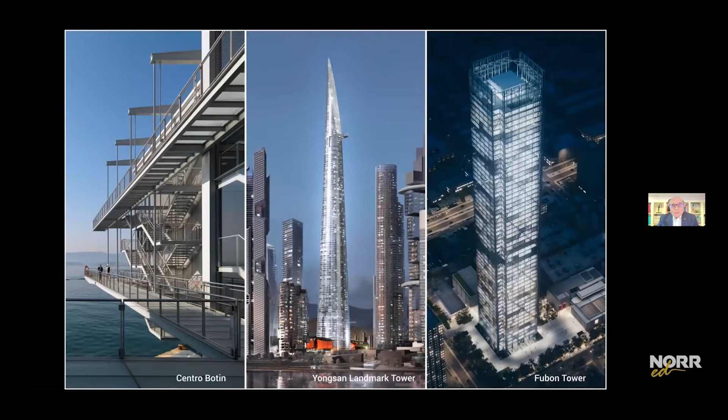End of quote. Maybe today, March of 2022, we can remember what Walter Gropius professed about design in his letter to Ove Arup in 1966, that architecture begins after engineering ends. Welcome to this NORR Ed engineering series today, as we feature our guest speaker, an internationally recognized structural engineer, and an engineer that I hope you will remember after the presentation today.

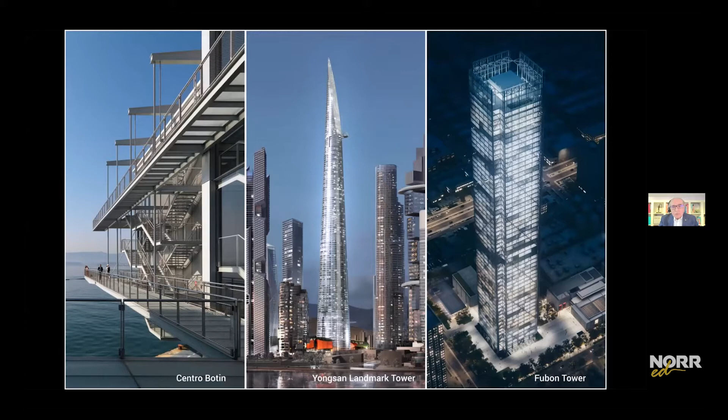I'm proud to welcome William Algaard, Director, Structures, Arup, London office. William has a PhD in civil engineering from the University of Glasgow. He also has a Master in Civil Engineering from the University of Glasgow and a Master of Sustainability Leadership from Cambridge University. He is Arup's London Tall Building Skills Leader and has worked on tall buildings in North and South America, Europe, the UK, and Asia. William has a background from academic research and Arup's Advanced Digital Engineering Group. He has developed a broad range of specialist skills in advanced analytical approaches within dynamics, blast, seismic engineering, and nonlinear response.

In 2005, William joined Arup's building group in London, where he led the engineering design and delivery of signature project elements at the Art Institute of Chicago. The last decade, William has acted as a structural engineer, leader, and project director for a broad range of projects, such as the International Whittle School developments, the A25 complex in Taipei, and the CERN Science Gateway.

William continues in the Arup culture and tradition set over 75 years ago, challenging convention, collaborating with architects, applying first-principle technical approaches and advanced analytical methods to realize elegant engineering architectural solutions. I will now ask William to share his presentation, Challenging Convention and Inquisitive Structural Design Ideology. I turn it over to William.

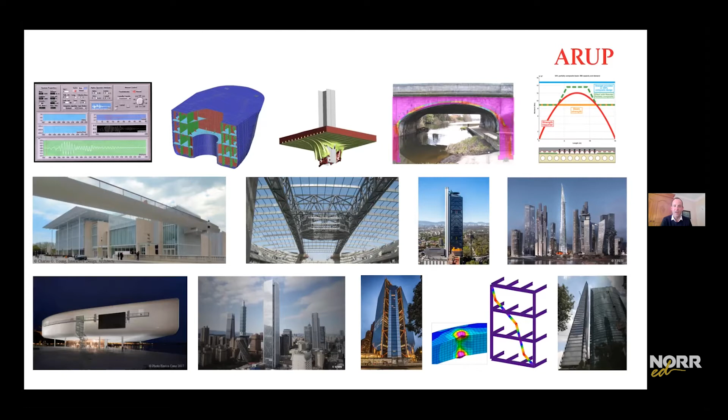And I'm certainly hoping for a good discussion afterwards, so start preparing those questions, and hopefully we can pick up on whatever you find most interesting later on.

After graduating, I decided to stay at university and completed research within something called pseudodynamic testing. This is an approach relevant to seismic design of buildings, where we model part of the system numerically or on the computer and other parts physically. The physical model is meant to capture the complex and tricky non-linear behavior, such as cracked concrete, while other variables are represented computationally without any difficulty or compromise. This was done at Glasgow University, and I know there are people from Glasgow on the call, so it's great to be able to talk about this work that I did in the very late 90s.

So even though I consider this work quite interesting, and the concept really does work, splitting the model between the lab and the computer, I'd argue I made many important developments, or at least I thought they were important at the time. But my advice to any students on the call would be to think about doing research in collaboration with industry and avoid being in an academic bubble, because I'm not totally convinced mine was as well linked to reality as it could have been. It's important to make the work as applicable as possible. But for me, the mindset of an experimental approach I developed during this period still influences me as an engineering designer today.

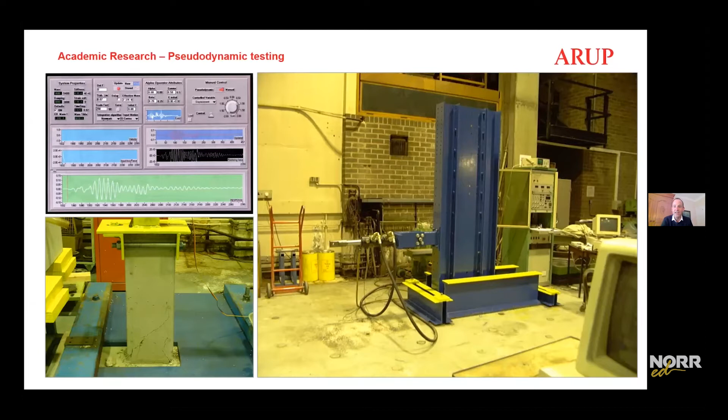So you might be asking, what does this have to do with architects or building engineers? And the answer will be not very much. It's one of the things I worked on not long after joining Arup in 2001, 2002. I completed detailed stress and buckling analysis on a floating production, storage and offloading vessel in the North Sea. The link here is around the tools and analytical approach I picked up during that work, which I've since applied to design projects later on.

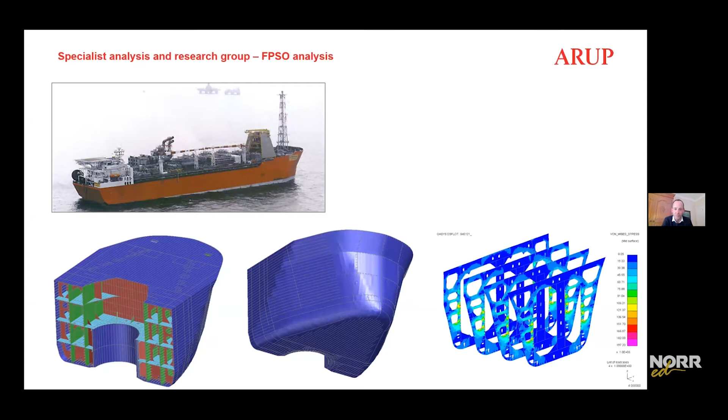Another unusual project, here I was looking at the behavior of floor slabs due to steel sections being dropped onto them during construction. The initial motivation was around site safety, and whether floor slabs could provide sufficient impact resistance to allow workers underneath locations where steel sections were being erected. The takeaway for me was building a deeper understanding of material behavior under extreme conditions and large deflections, and the concept that you can calculate most things. If you do it correctly, you can develop a really good representation of even the most complex structural behavior like this. It's definitely helped shape the approach and trust I have in analytical techniques I apply today.

When I prepared for this talk, one surprising finding was that the publication we made on this work, which took only a couple of months, was actually cited in many more publications than my work at university. So applicability is really critical.

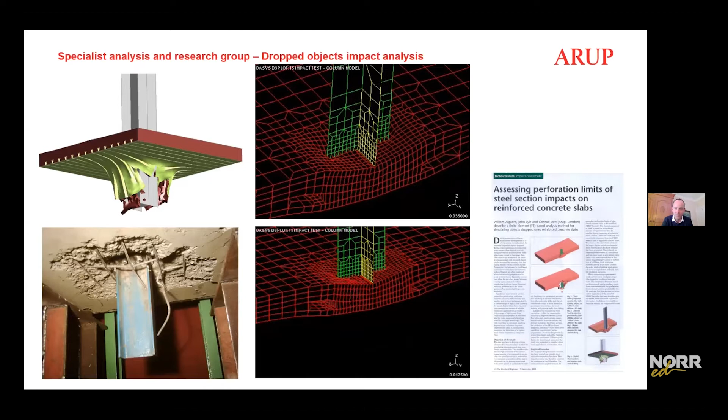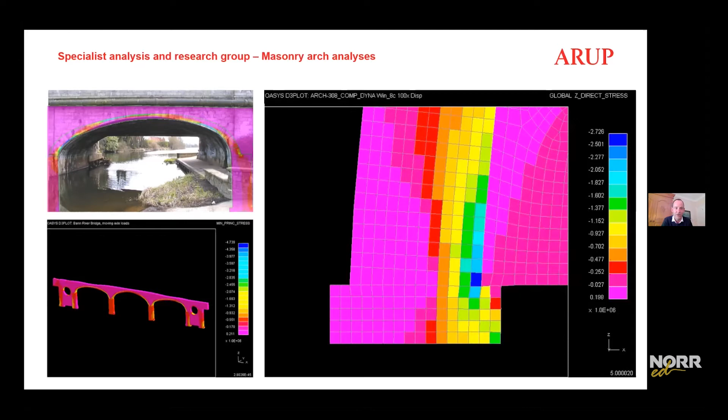Potentially even more peripheral is this analysis and assessment of some masonry arches. Masonry is surprisingly complex compared to steel or even reinforced concrete, because it carries essentially no tension and relies on focusing compression down narrow lines. I'm not going to go into detail of what this is, but it's another example of being able to develop a very complex analytical representation of something that behaves in a tricky way, building up that belief that this can all be done. You just have to apply the right tools and processes to make it happen. This still impacts how I approach things in my work as a designer today.

I meant to say earlier that all of these projects I worked on as part of a team. None of these projects I did by myself, and I feel extremely privileged to have worked with so many talented people through my career. I'd say this is the primary reason why I've been able to gain the experience I have along the way. Later on, this is not just from other structural engineers, but also from the broader engineering teams, and also from architectural collaborators through multiple projects.

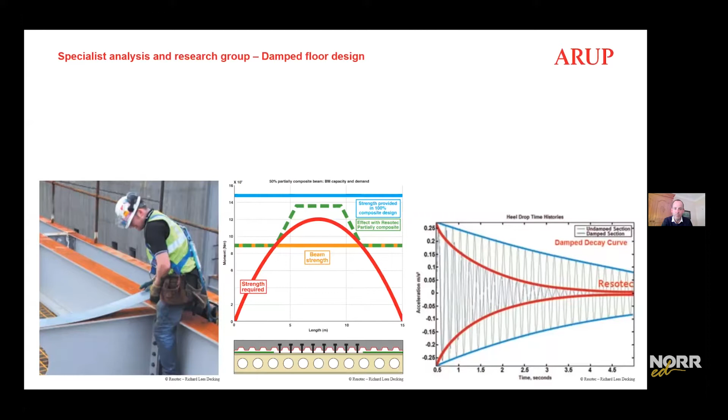So enough about research and specialist analysis. You might be pleased to hear that this is now about design and construction, and primarily buildings.

This is the first project I worked on, the Nichols Bridgeway at the Art Institute in Chicago. Some of you may know the project and have walked across it. The project director at Arup quickly identified special engineering challenges when Renzo Piano said he wanted the bridge to be like a blade flying through the air. This is one of the first architectural sketches, indicating a depth of 2 to 5 feet for the 200-foot long span.

In the end, it was even more slender, about 1.35 meters deep for a span of more than 60 meters. This was not long after the Millennium Bridge in London, famous for its lateral wobble, or synchronous excitation. So bringing in specialist dynamics and footfall skills to the project was definitely the right approach.

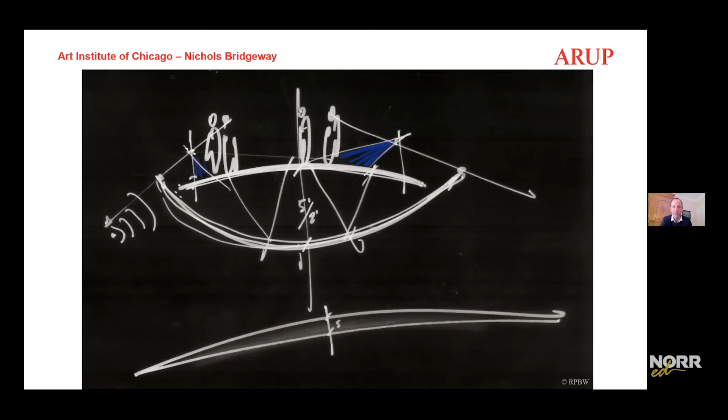Jumping ahead, this image during construction shows the southern half of the bridge. There's one support far to the left, and two supports by the building itself - one by the cherry picker and another just to the right of it. Then there's a roughly 15-meter cantilever, if I remember correctly.

There was a funny moment in the architectural discussions on this project, where after successfully eliminating all the columns in the southern half of the bridge, the question came up: can we now take out all the columns in the northern half? Unfortunately I had to disappoint on that one, but very successful nonetheless.

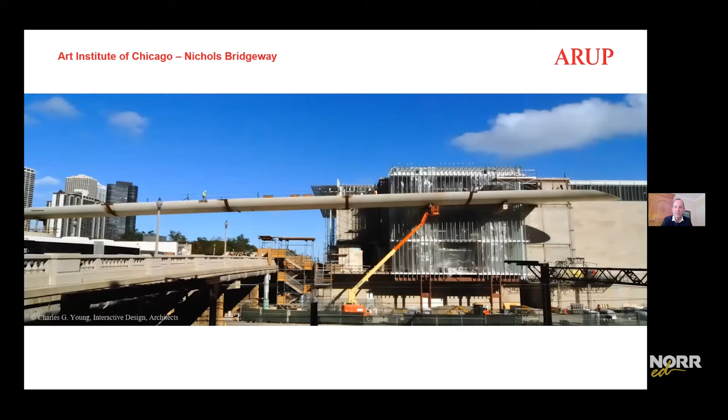So in the end, the result, I would argue, certainly was a little bit blade-like. But how did we actually get there?

One of the architectural references for the design was a ship's hull. It was clear early on that architecturally it was important that this was an expressed shell structure, not a great big girder or pair of girders clad with a shell. Given the proportions of the concept, it became clear during bidding and tendering - when somebody proposed a clad solution instead - that this turned out to be completely unviable. The proportions are so squeezed that it can only work as a genuinely expressed structure.

Having worked on ship hull analysis previously, this also became an engineering reference for me, and there are loads of parallels. Even using different design codes, the physics is often the same - though not always; there's no wave impact on this bridge, at least I hope not. But most of the physics is the same, and not only the physics, but also the analytical tools we adopted were the same.

All of this engineering was pretty familiar to me, and I could do this, but the ping pong with the architects and the concept of design as an open-ended and open process was certainly new to me, and something I started enjoying.

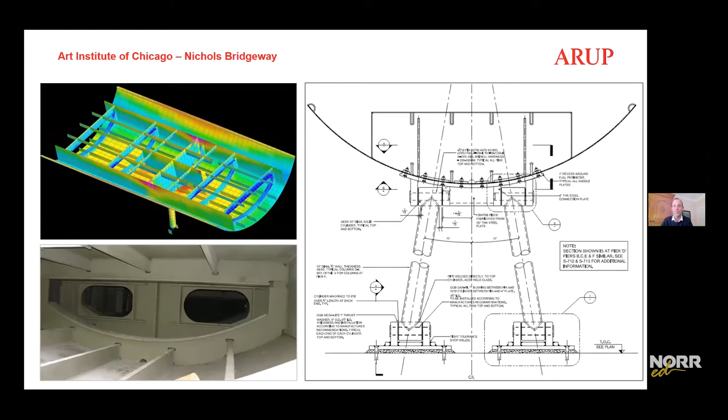One of the tricky aspects of the structural design of this thin plate shell solution was establishing the buckling resistance for the free edges on these hulls. If I go back briefly to the other image, you can see on the section the edges are completely free, with only a half pipe welded on to give it some local stability - but it's not fixed back to the main hull.

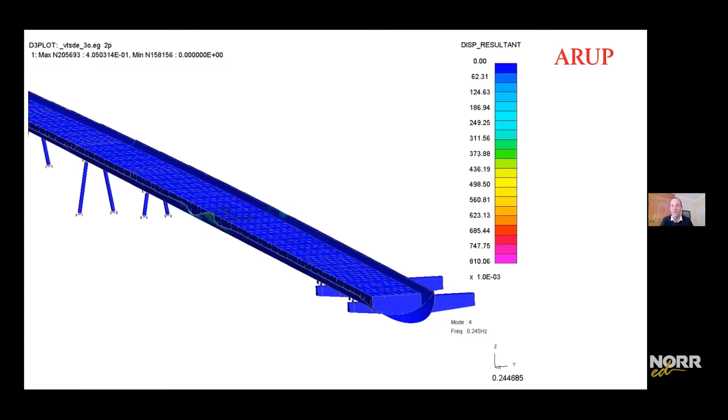So demonstrating the buckling resistance for this condition was pretty tricky, but with a shell plate analysis similar to that for vessels in the North Sea, this becomes a routine process. Now, if any structural engineers on the call notice a frequency number of 0.245 hertz, they're right that this has nothing to do with the dynamic frequency - but if you multiply by 2 pi, you get 1.54, which is the buckling load factor. So this is the output of a buckling analysis.

So thin plate shell justification was one engineering challenge. The other was around the dynamics of a very slender footbridge - dynamics and vibrations caused by normal walking, even though at the time there was quite a lot of debate about the effect of running or groups of people walking and whether this could be more onerous.

As I mentioned, this was only a few years after the Millennium Bridge experience in London, where damping had to be retrofitted to make it behave comfortably. So the long span slender bridge was always going to be low frequency, around 1.5 hertz, but the large modal mass of about 70 tons that we calculated demonstrated the vibration should be well within recommended limits.

Now, I mentioned debates around group effects and other scenarios, but in the end it was pretty clear that the peak footfall was actually caused just by a single person walking, and at a pretty slow pace. What wasn't so clear was exactly how this would feel in practice.

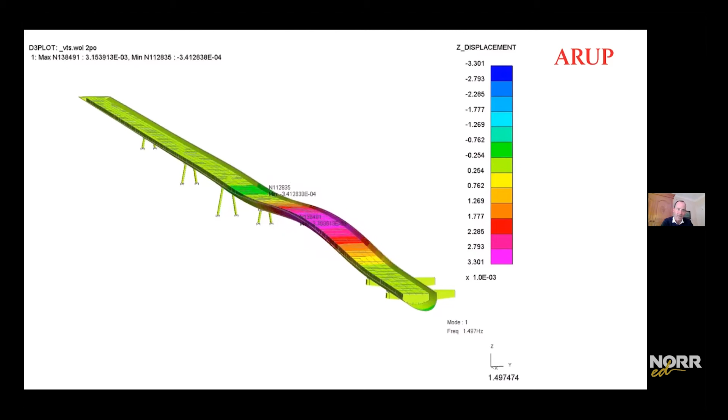So it's a bit complicated, and it's the only graph I'm going to show today. This is at a high level meant to be a representation of a system to quantify the perception of vibrations, or the tolerance of vibrations. The kinked horizontal curves represent acceptability criteria in various circumstances, such as office floors at the top.

Oh sorry, the other way. Yeah, that's right, the other way around. So I got that the other way around, I can't see the full image here. Outdoor footbridges is at the top, peaking at 10% G, then indoor circulation, and then in white, office spaces. The bottom dashed line is the threshold of perception.

So the vertical axis is the magnitude of the vibrations or the accelerations, and the horizontal axis is the frequency of the vibration or the waves. Typical floors are often in the range of 4 to 8 hertz, which according to this published guidance is also the area with the highest sensitivity. So higher frequencies are apparently less sensitive, and according to this, also lower frequencies are less sensitive.

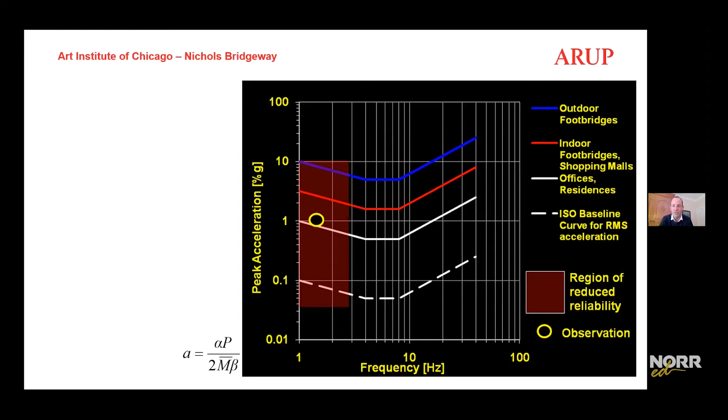We'll come back to this later, but the dot here, the yellow and black dot, represents the main span of the footbridge, which we can see is really a long way inside the outdoor bridge criteria, in fact almost complying with office floors. But I've earlier presented this topic at bridge conferences, on how I think the guidance and these curves are not necessarily representative of reality, and how this is perceived in practice can be pretty subjective and also very location dependent.

Okay, another project. This is the Dubai Sports Complex, later called the Hamdan Sports Complex in Dubai. It's a huge swimming arena with about 15,000 spectators, or 15,000 seats, which we designed with FaulknerBrowns Architects. The project started in I think September, October 2008, with an intention to host the World Swimming Championships in 2010.

So an incredibly ambitious design and construction program. This was also a time of massive construction demand and cost inflation. So one of the unusual challenges was having to order the structural steelwork during concept design. Pretty early on, we had to commit to all the primary steel sections, particularly for the long span roof, which we did, and then did our best to keep those sections working for these massive roof trusses as we went through detailed design.

These trusses, by the way, are so big that you could drive a double-deck London bus through them, but I wouldn't recommend that you try.

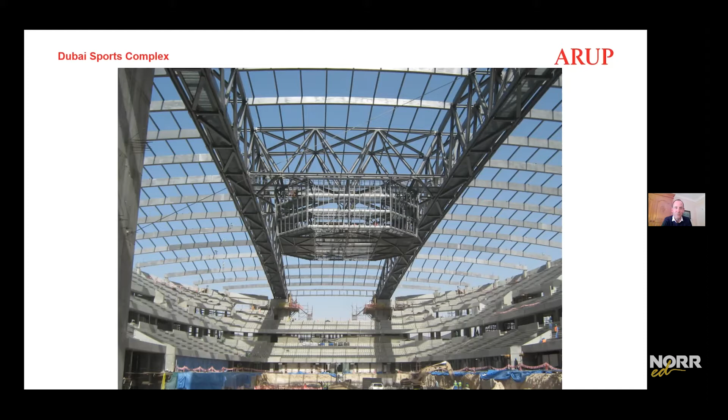Going back to procurement decisions and ordering sections, of course this is always going to be a risky approach, and the easy answer in such circumstances is being very conservative and just saying you need something bigger than what you hope. But the approach we took here was pretty different, because if you're conservative early on, you'll never be able to make the savings later on, and you're going to build in inefficiency, which we didn't want to do. So we did it the other way around, possibly pretty naive, but we set a pretty high ambition, and then we had to pull out all the stops to stick with it.

And largely we managed to do that. I'm not going to say much more about this project, just very briefly about how we achieved that tonnage target and managed to keep applying the sections.

So one of the things we did was going from simply supported roof trusses to taking full continuity through the middle support, which is the kind of middle pair of pink concrete columns there. This allowed us not just to make savings in the roof trusses, but also avoid movement joints within the roof cladding itself.

One of the key challenges on the project, I would say, was accommodating movements that resulted from the curved trusses and also curved girders that we had, both due to wind response, with the wind lifting and pushing down generating deflections on plan, and then of course also thermal expansion and contraction. So we had quite a complex system of bearings, including under each of the girders.

And then we used the clerestory window trusses that you can see all the way around to provide lateral torsional restraint to the girders. So normally I'd work pretty hard to avoid bearings and lock things together as much as I can, but on this project that was unavoidable.

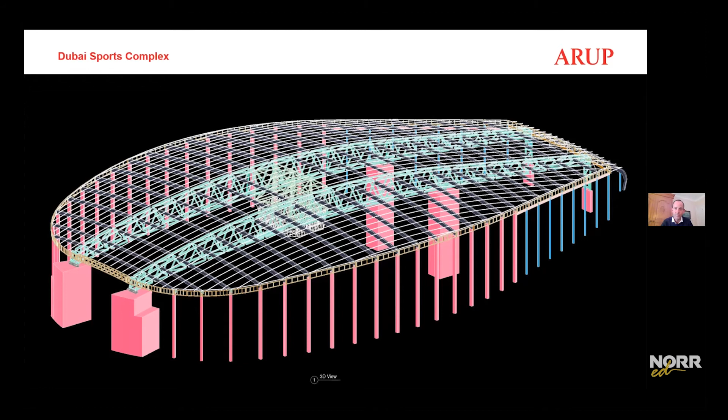But that wasn't quite the case. This is BBVA tower in Mexico City that we completed with Roger Stirk Harbour and Partners in London, and Legorreta in Mexico City. On this project, I'd like to explore another aspect of the design approach and try to indicate how our experience might shape the outcomes of a project.

This project was selected through a multidisciplinary design competition back in, I think, 2009. It's about 235 meters tall, and Mexico City is, of course, a highly seismic location with very soft soil. Our team had an experienced and strategic project director, but the main team, including myself, would maybe argue that we were generally analytically skilled and keen to get into this, but without much real high-rise or even seismic design experience. Seismic analysis was one thing, but seismic design, a different thing.

Just very quickly showing the overall components of the project. This here is actually level 12, which is where the main lobby of the tower is. The tower is on the left, the kind of square, chamfered square on the bottom left. As I say, the lobby is at level 12, so the lower 11 floors are primarily parking and a couple of MEP floors. It's a very unusual configuration.

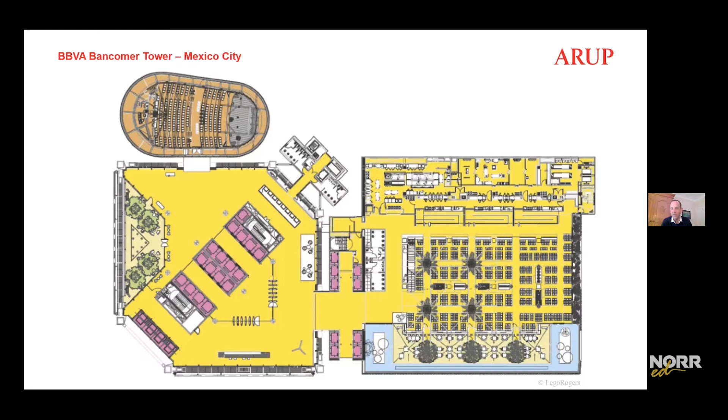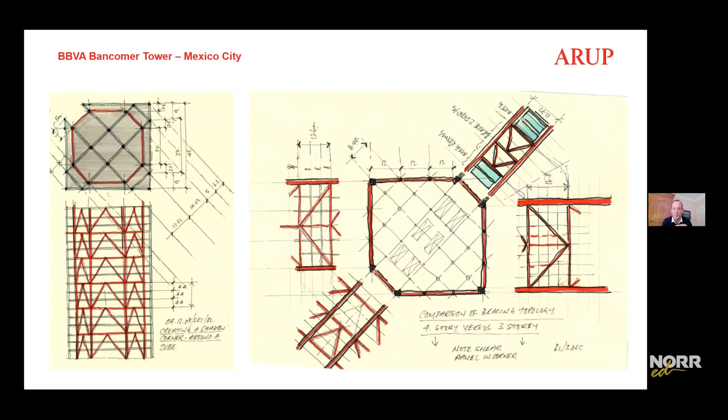This was a sketch from the project director, Bob Lang, who was also very much my mentor in the transition from analyst to engineering designer. This sketch was something he developed in the first couple of weeks, and it showed the strategic design direction with a perimeter steel frame and a core-less floor plate. I should have maybe mentioned earlier that the concept of having no structural core was fundamental to the whole approach for the vehicle circulation within the tower footprint, both in the basement and in the tower superstructure.

Moving about a year or so ahead in time, this shows how the design evolved while all the principles were actually retained. One thing that's maybe not so visible here is that the envelope was located inside this megaframe, so in between the floor plate, which is the kind of gray and red, and the megaframe, which is the blue. Of course this generates all sorts of complications related to the seismic attachment of the floor plate to the megaframe, but also differential thermal effects and buildability considerations. But we applied our trusted analytical approaches and felt we could handle that.

What's also maybe not so clear is the fact that there's only 8 perimeter columns on this project, so in each corner there is a single column. These are actually spaced at up to 35 meters. On the interior side, there's a single column on the floor plate and then 3 rows of columns kind of next to where the lifts are, which isn't the structural core but is a central part of the floor plate. On the bottom right, we can see one of the nodes in the corner, where the blue is the external megaframe concrete filled columns and braces, and the red is kind of more conventional floor construction.

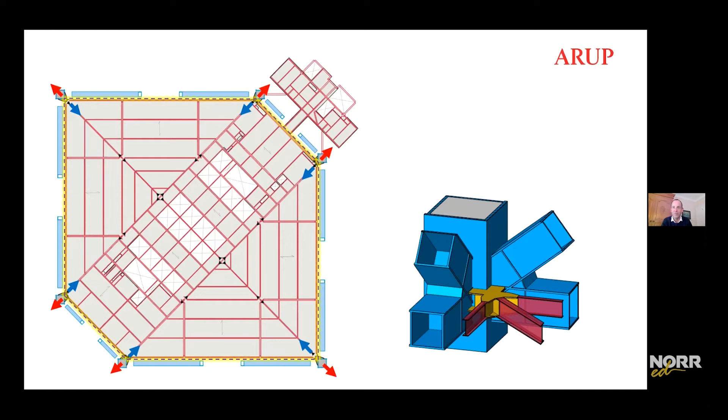The image on the left shows all the building components in the right proportion. The tower was only part of the story, and it was really defined and characterized by the megaframe. The megaframe itself is an eccentric braced frame, a frame where the braces actually don't meet, which is something we'd always avoid, but in this case we wanted to do. It's on a 3-story module, and that eccentricity allows for ductility, or plastic deformation or distortion, to happen within what we call the link or the yielding zone in the middle. I'm going to talk more about ductility later on, but this is a fundamental aspect of seismic design. So the floor plates, of course, don't span 35 meters.

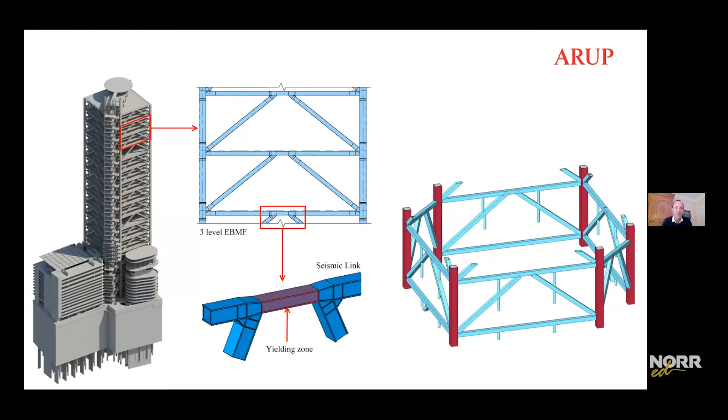These are picked up by intermediate posts, which are then transferred out to the mega frame every 3 stories, and the load ultimately ends up in the big columns in the corners. And because this frame was external and eccentric and braced and on a mega level, and we couldn't find any precedent for this, we called it the world's first external eccentric braced mega frame.

The seismic behavior of the link and the frame overall, of course, is critical. It's what's holding the building up. And when the deformation is focused into a relatively small number of small elements, it's crucial to fully evaluate the plastic deformation capacity that can happen in the link element.

So we designed the frame so that this link actually could be removed and replaced in the event of a severe earthquake. And this is certainly a big part of the seismic resilience strategy, so that you can repair and reuse the building rather than to have to demolish and condemn the building after a large earthquake.

This is something codes don't really pick up on, and it's something I'm not really going to go into on this talk today, but it's something that's starting to be much more understood and valued also by clients. We can get into this in the questions potentially later on.

Going back to the links, with the long duration earthquakes that we have in Mexico City, things like plastic fatigue is really a key design criterion, particularly for this design approach. To evaluate this in the level of detail that we needed to, I don't think we could have done without the close link between the specialist analytical support team and the engineering design team that works with the architects. At this point, I kind of was an engineering designer, but I wasn't so long ago an analyst supporting this kind of thing, so I could straddle the 2 camps.

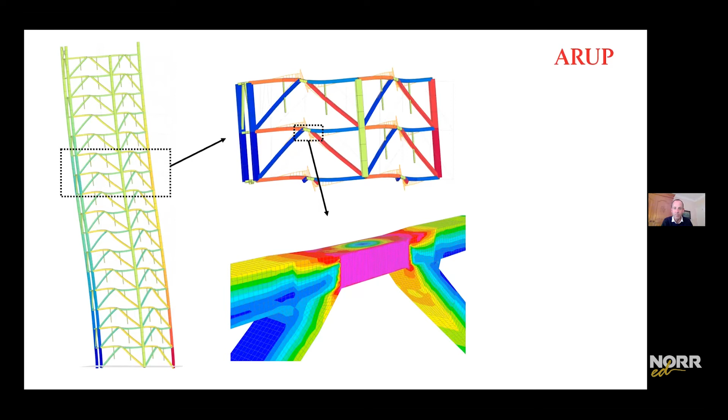One of probably the biggest challenges on the project was to get the transition from the steel superstructure and the mega columns into the foundations. The foundations were built top down, and most of the load had to be transferred into diaphragm walls or slurry wall panels, which are basically disconnected. So getting a massive load from the columns at 35-meter spacing into essentially independent panels was pretty tricky, and we scratched our heads for a long time on this one.

In the end we came up with a 2-story base plate in the form of a 10 by 10 meter, 50-ton node that was embedded in a 2-story capping beam, which ultimately could deliver the load where it needed to. But we certainly would think again of having this kind of column spacing on another project.

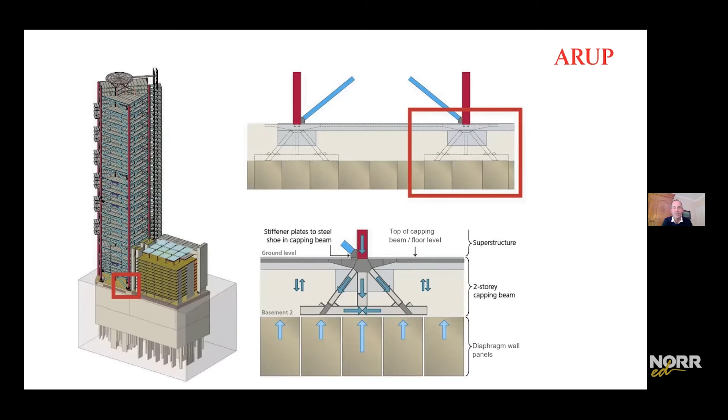So this project had about 14,000 tons of steel, and I thought at this point, surely it's not going to get any bigger and better than this. And in a way, I was right, even if I didn't think so at the time.

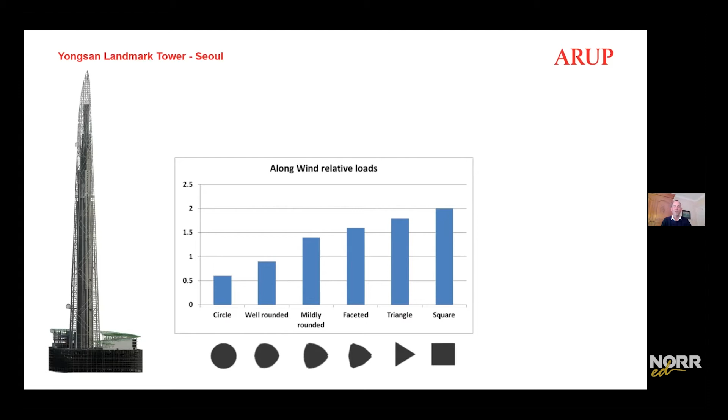So when dealing with a 620 meter tall building in the typhoon zone, the first and probably most critical job for a structural engineer is to advise on the massing and the aerodynamic sculpting of the building. This should really come ahead of talking about materials or systems or column spacing or any other aspect of the structural configuration. This chart, of course, is overly simplified, but it's meant to indicate how a circular or well-rounded plan form reduces the drag or the along-wind forces quite substantially compared to either a square or some other more angular plan form of the building.

Vortex shedding and dynamic wind loading critically also relates to any changes in the plan shape over the height. So tapering form is always a great approach for tall, slender buildings, as consistent vortex shedding occurs only at a small part of the height at the same time. When you've got a smaller diameter, it will vortex shed at a different wind speed, so you only get a small proportion of the height acting at any one time.

Now, I wish I could have taken credit for the massing solution taken forward on this project, with a conical form and only a slight slice taken into it, because it's super effective in reducing the wind loads. But I can't take that credit—the architects at RPBW came up with this themselves, and of course I eagerly supported it.

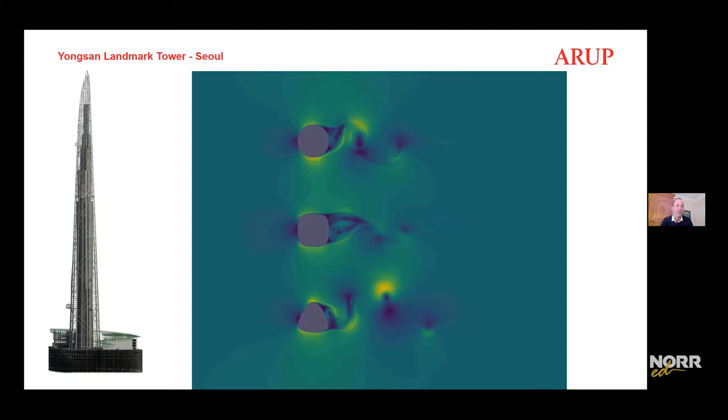The only potential improvement I could identify even later on was that if we'd eliminated that cut, or even rotated the building slightly to not catch the typhoon loads in the same way, that would have been quite helpful, because in Seoul typhoons can only ever really arrive from one direction. So that could have made a small impact, but overall it was an incredibly good building massing.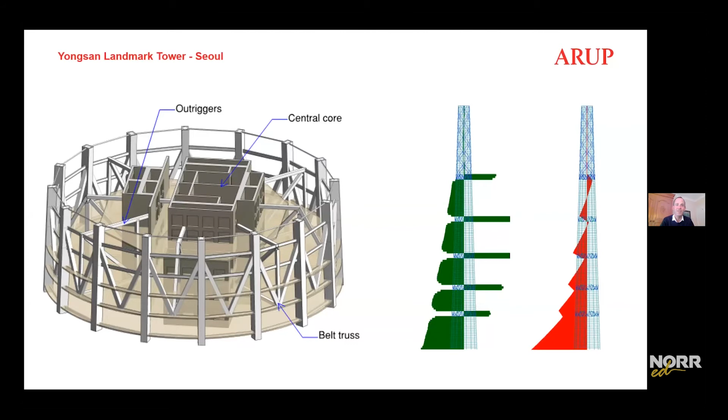The alternative approach, or one of the alternative approaches, is a full perimeter braced system. This is where diagonal braces are provided on the face of the building, and these mobilize the perimeter columns directly, without any connection between the core and the perimeter. It's a pretty smooth system, but of course you do have to have all those braces, which are quite a strong element on the facade, and also cut across the floor plate.

So with this system, the shear remains both in the core and in the perimeter, and there's limited exchange of forces, but it's pretty smooth and efficient, a kind of clean system.

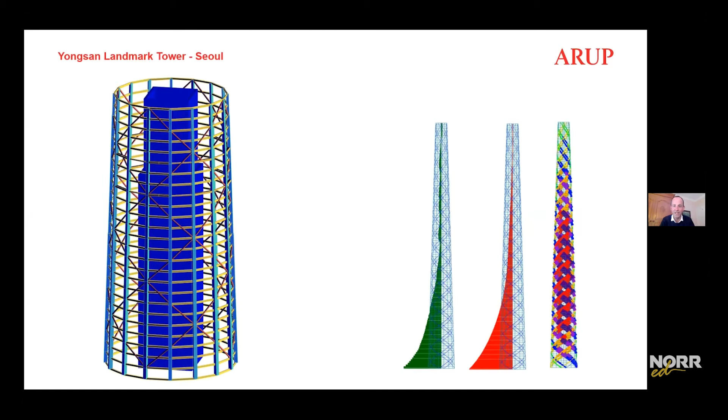But on this project, we decided we wanted to explore things further analytically, without really having a particular solution or idea in mind. It was a kind of open-ended process that we embarked on. We played around with consolidating the braces in fewer areas, and in the end we came up with something termed the helix bracing system.

This is essentially a discontinuous bracing system that only works in collaboration with the core—it wouldn't work on its own. It took us a pretty long time to figure out how it worked, much longer than it took us to understand that it would work.

In the end, we concluded it actually works as an indirect outrigger system, which is something else again that I'm not going to go into. But indirect outrigger is normally pretty harsh, again creating massive forces in the floor plates because you have to exchange big forces between the core and the perimeter columns.

But because of the circular geometry of this project, with braces that go around an angle, changing direction bit by bit, the force flow is very gradual. The shear force diagram in the core, the green diagram here, shows how this is incredibly smooth and gradual, and I'd argue completely unique—I can't recall having seen anything like it on any other project or building system.

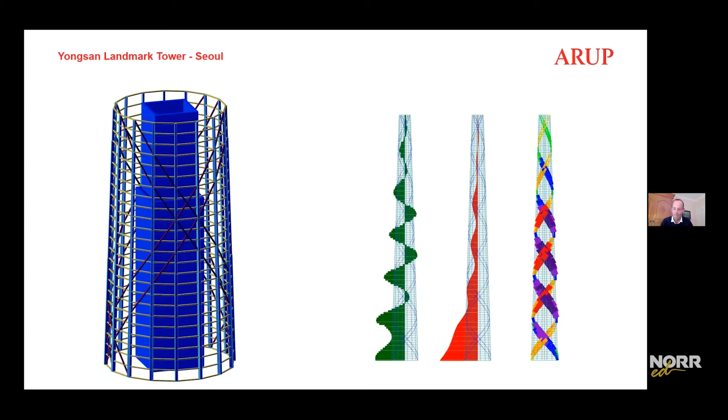So again, just looking at how these helices are developed, we've got a double helix in each direction, each made up from a pair of braces. So there's actually still quite a lot of braces, but they're focused in a very different way from a regular configuration.

There was another curve that I forgot about, but on this one you can see the proportion of shear in the core as a proportion of the total shear. It never gets amplified, and it's a very gradual and smooth picture, which means you don't have to design for any abrupt loads within the structure.

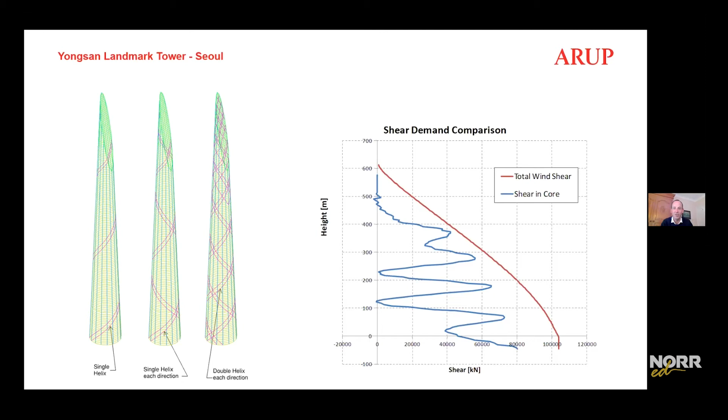When we presented this at the time, we were trying to make the point that the first step we took was to provide all the elements that support gravity - the floor plates, the core, and the columns. These all form the gravity system in the project.

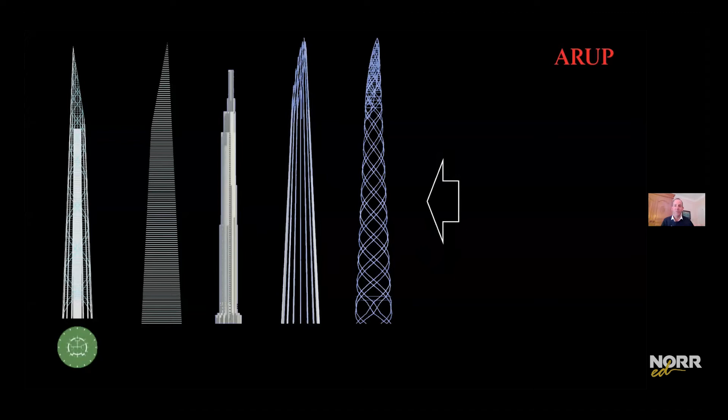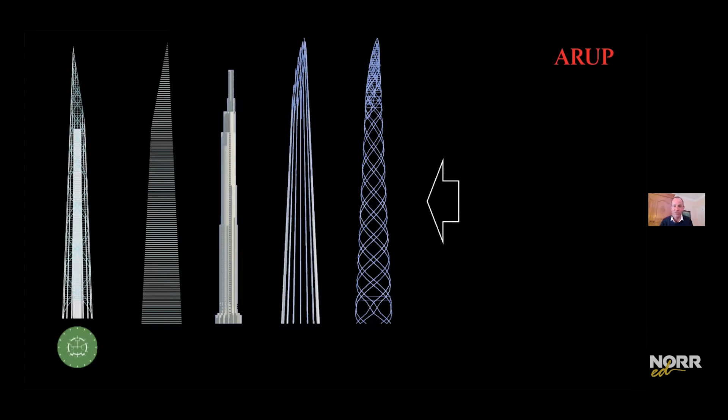Then simply by adding the helix bracing, all these same elements become coupled together and mobilize to carry the wind load together. It's pretty unusual that even the floor plates contribute to this process. Because the force transfer is so distributed, they can actually do this implicitly without having to provide any additional material. So once you've designed it for gravity, you stick in the helix braces and we can resist the wind pretty efficiently and stiffly.

Of course, many other interesting stories on the project, such as the core stacking and even the core shape - we had a square core at one point, then a round core. And then also composite column design - in this case we used SRC columns, steel reinforced concrete columns.

Of course, differential shortening and creep were major considerations on the project. One of the disadvantages of the tapering tower is that the location where the differential vertical movements, due to shortening and creep in the columns and the core, are the biggest is where the floor spans are the shortest - not a very forgiving condition.

So we definitely needed a strategic approach to designing the system to limit differential vertical movements, which generally means trying to balance the stresses in the core and the columns so they're equally stressed, equally loaded. So very careful allocation of material to all the vertical project components.

In the context of the creep and shortening, we identified that something like 40% of the column load in some of the columns was due to the weight of the column above. So the self-weight even of the columns becomes a pretty major driver on the structural design.

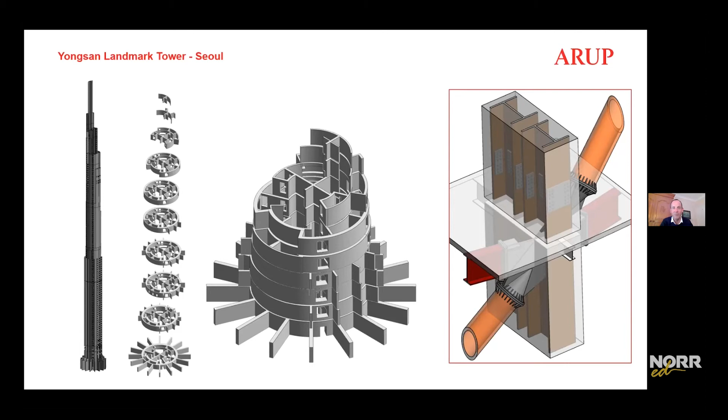But overall, the project was super efficient - about 90 kilograms of steel per meter squared, and about 0.45 meter cubed per meter squared of concrete, albeit, of course, very high strength concrete.

Now, at the time, embodied carbon wasn't really in the vocabulary - certainly wasn't a widespread discussion topic or design consideration. But then again, material efficiency and structural quantities have always been a big driver in high-rise buildings, so the two are pretty much linked. If you do a very economical high-rise building, you're also likely to do a pretty low carbon one as well.

So taking a break from the towers, this is a little project I worked on actually at a similar time to the landmark tower - this is Centro Botín in Santander, Spain, completely different scale. The main challenge here was the horizontal nature of the structure rather than the vertical nature. But throughout the project, there was immense attention to detail in the design of the numerous expressed structural elements.

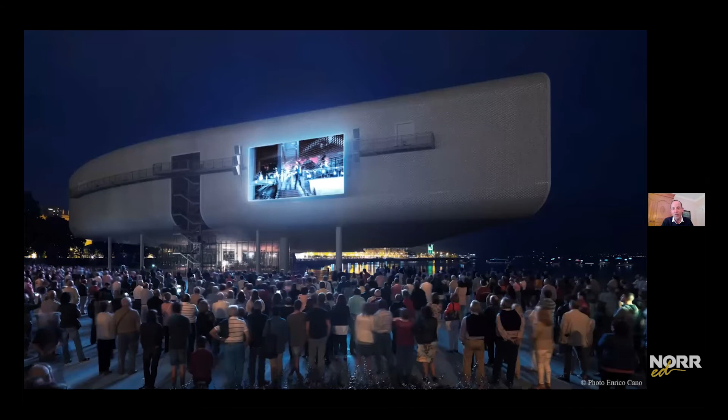Some really quite huge cantilevers, I think a 24-meter cantilever if I remember correctly. And of course, the whole building raised off the ground, apparently pretty effortlessly. So not only do we need to fight gravity, but we also need to make it look easy, even if it isn't. And then minimum columns and minimum stability, minimum size of stability elements between the ground and the elevated volume.

In fact, on this project we used some steel tubes around mechanical risers as the only main stability element. You can see in the middle of the picture, under the screen, in between the two columns, one of these cylinders, which is how we stabilize the building. So pretty finely tuned design for this.

And the building also extends a long way over the sea, so buildability of this was, of course, a pretty complex and unique additional challenge on the project.

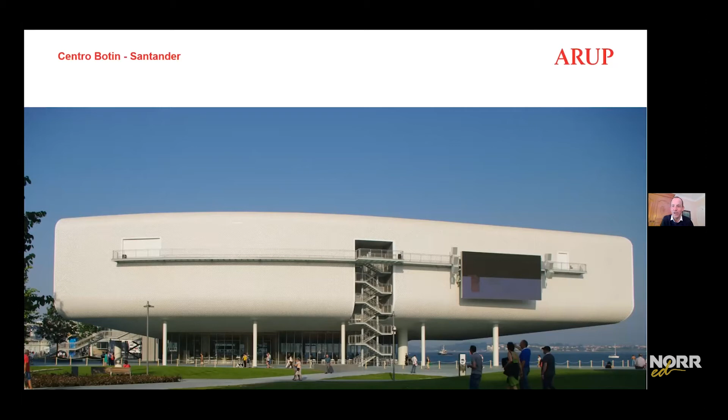Just another picture. At the opening of this, one of the partners at RPBW actually commented that the columns look too thin, which I wasn't quite sure how to interpret, but I chose to take it as a compliment.

Of course, gravity still exists in Santander, and the design only works because of substantial and pretty complex structure that's embedded and hidden mostly from view. So really quite close collaboration between architect and engineer was needed to make something like this viable, because not only do you need the structure, but you need it in the right place, and you need it to fit in with the architecture, or you need the architecture to fit in with the structure. Take your pick, but it's give and take and ping pong along the way to make it happen.

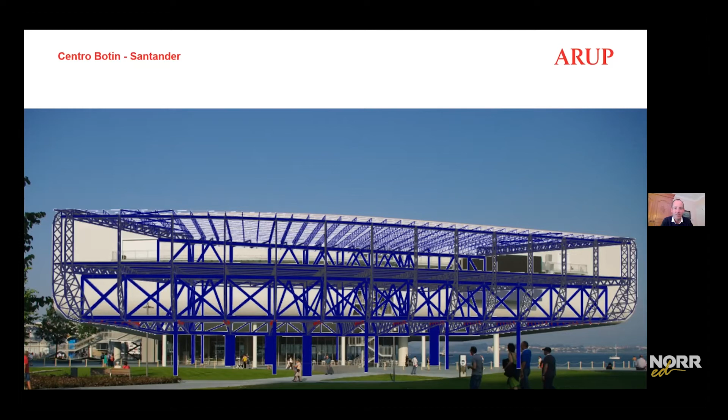But what I actually really wanted to talk about on this project was some of the elevated and suspended circulation structure, or kind of deck, shown in this image. This deck is located between two buildings, or two halves of a building, and it forms a kind of piazza, but also a series of observation decks, and also forms part of the egress and access system.

And because all these walkways have an absolute minimum amount of vertical support, even where we have hangers, these only attach to one side, typically the inside of these passerelles. So incredibly challenging to get the dynamics to work out on something like this.

Here's an image from below — of course, glass floor, but also you might notice no columns. So really quite slender, long spans, and very, very few columns.

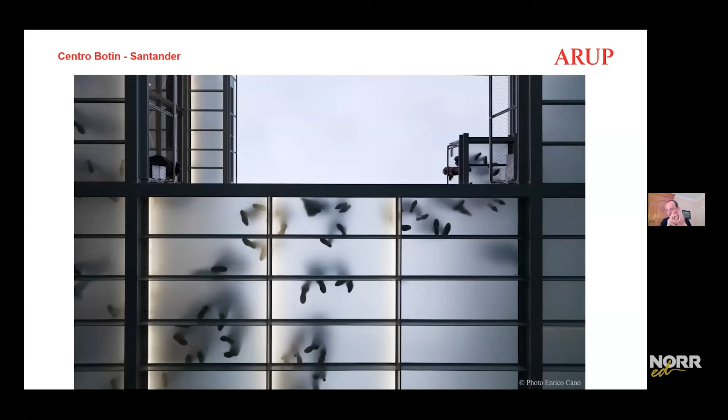And because it's over the sea, the perception of these vibrations could also be interpreted pretty onerously — you might not feel particularly reassured or safe if you can perceive the vibrations too significantly. So we thought the only way to be clear on what we thought the criteria were on this was by doing some mock-ups of the condition.

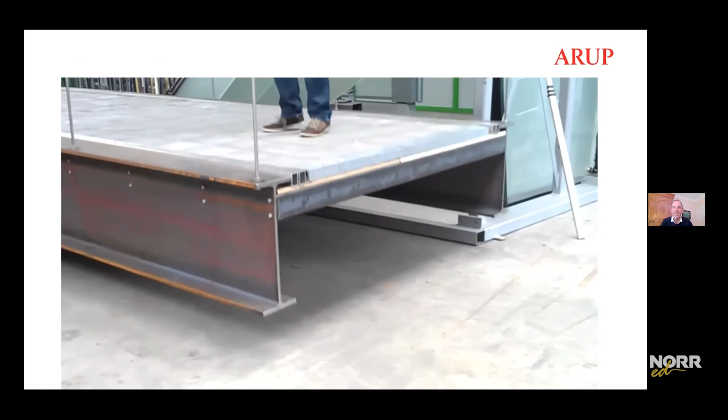So this one shows the undamped configuration. This was a kind of structural mock-up meant to represent the dynamic properties correctly. A single person could get this moving quite dramatically — you can probably hear that noise in the background.

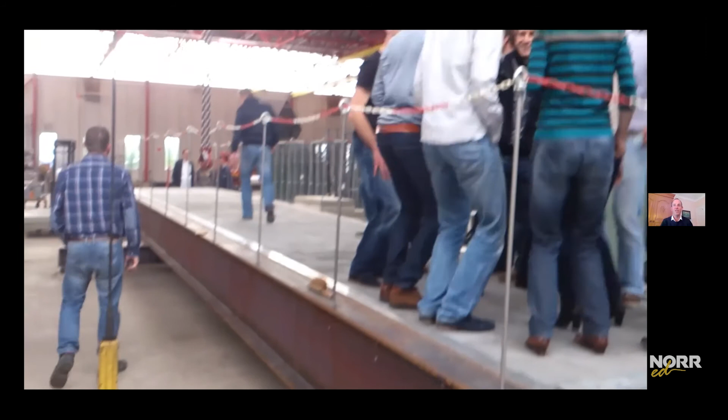We then went along and looked at what happened if you had more people, and this was, of course, an absolute disaster. The kind of vandal design condition was pretty difficult. You didn't need 10 people, but if you did put 10 people on it, we were pretty worried you could scare people and also potentially damage the structure.

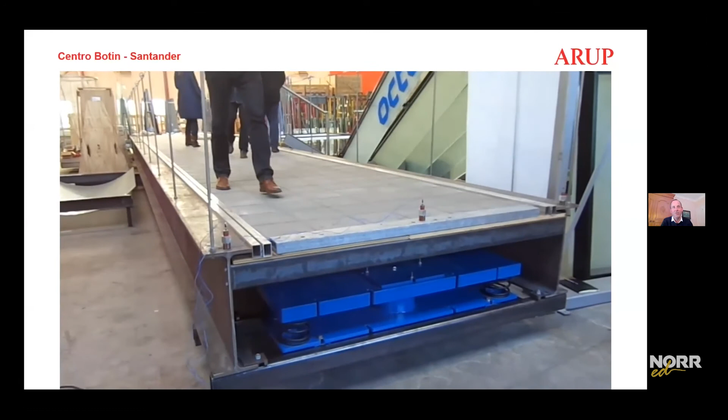So early on, we knew we needed to damp this platform, this trampoline. So here is an example of one of the configurations of how this behaves with the damper — instead of the structure moving, you focus the movement within the damper itself.

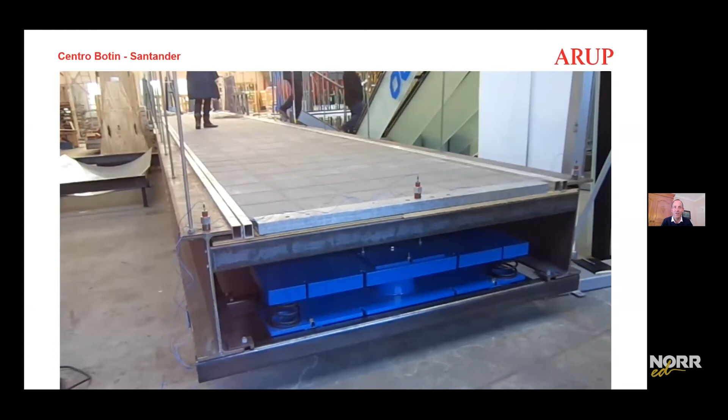But there were a couple of challenges with this, and we also struggled to make it fit within the girders, within the structural zone of the project. But overall, we thought it could work. However, if you really wanted to, we then identified that you could actually exceed the stroke of this thing, so it wasn't quite there — we needed to do something else.

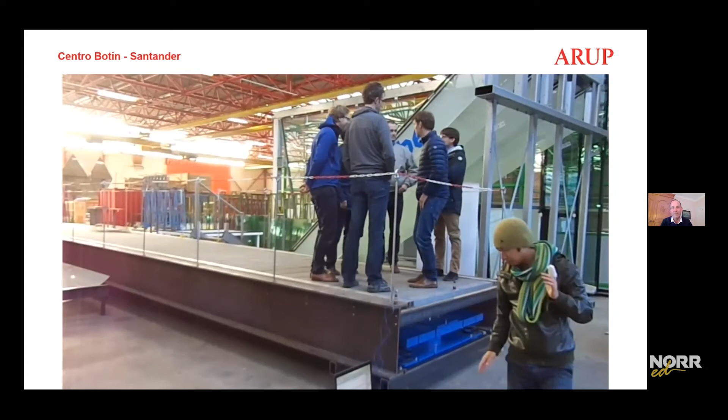So we went back and managed to get a little bit more stiffness within the structure. By doing that, increasing the frequency, the tuning of the damper worked much better, and we could actually use the same damper in the permanent condition. And because the damper, of course, looks so great, the architects decided that this should actually be expressed.

This was a pretty unusual and rare opportunity to express some of the advanced, complex structural behavior within the design architecturally. Really quite special and exciting.

Here's another picture showing a big group of people standing at the tip of this, and I'm pretty sure they would not be there, or wouldn't be very happy, if we didn't have the damper doing its job underneath.

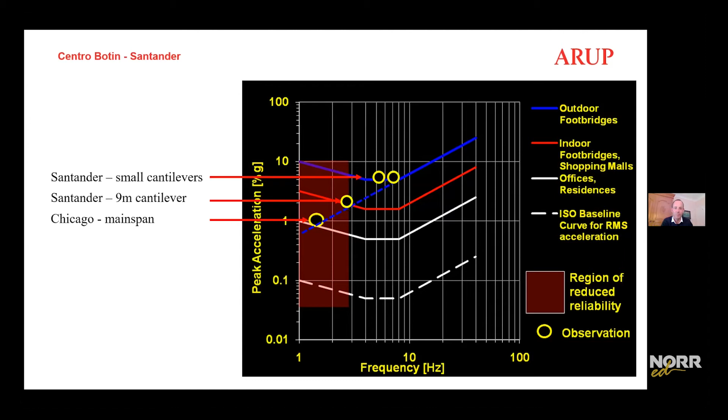So back to towers and tall buildings. This is A25, often referred to as Fubon Tower in Taipei, Taiwan. This too is with Renzo Piano Building Workshop. Currently under construction, it's topped out, mostly clad, and due to complete later this year. 265 meters tall and relatively slender.

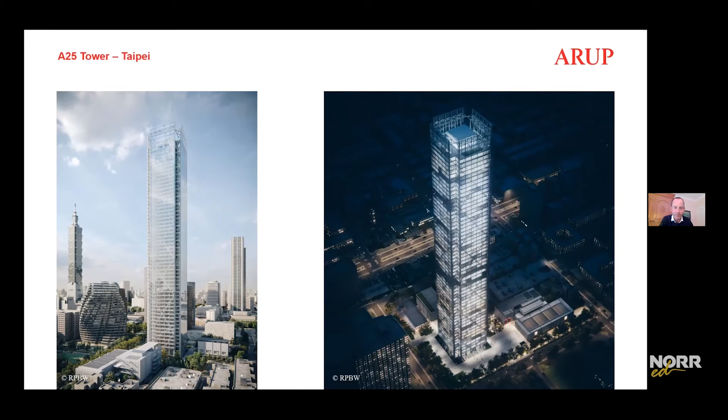Some of the key architectural aspirations here were transparency, both in relation to the facade and to the structure, both of which I'd say are pretty successful. I'm not going to talk about facades today, but I will talk a bit about the structure.

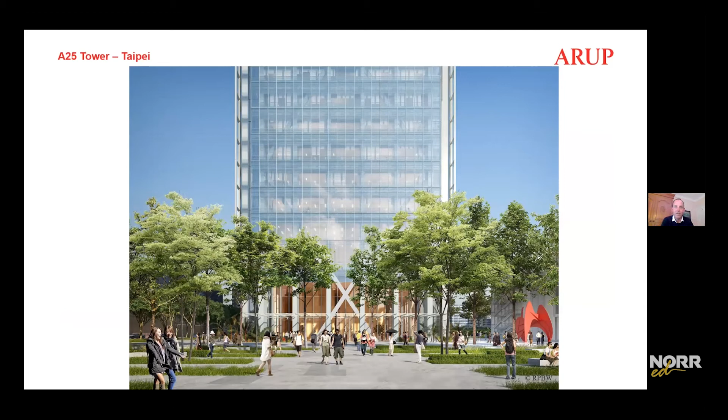Having learned from BBVA that a column spacing of 35 meters doesn't make our life particularly easy, here we did the complete opposite, going for a really close column spacing of 5.8 meters. This wasn't just to make the foundation interface more bearable, but also related to the approach we took, which followed the code framework in Taiwan more closely than we did in Mexico City, which was more a performance-based seismic design. But unlike Mexico City, Taipei is exposed to typhoons pretty regularly, and on top of that it's also highly seismic with very soft soil. So you've got all the challenges happening at the same time.

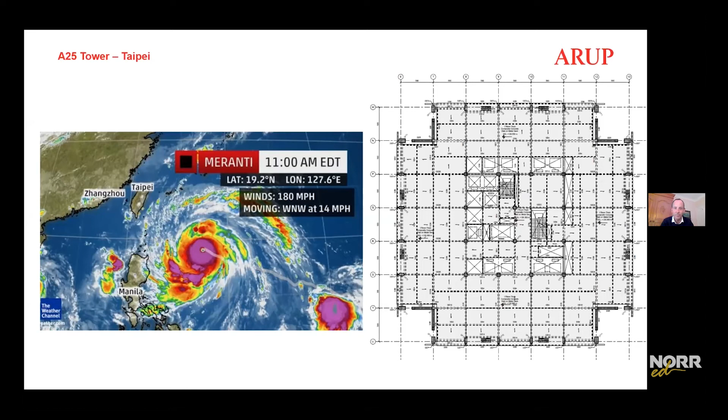Given the height, slenderness, and environmental demands, it was pretty clear to me early on that we needed to mobilize the perimeter columns to resist the wind loading and the seismic load. Because the perimeter columns are so much more effective in resisting overturning, we decided here too that there wasn't really much value in trying to use the core for anything. So that was all pretty clear.

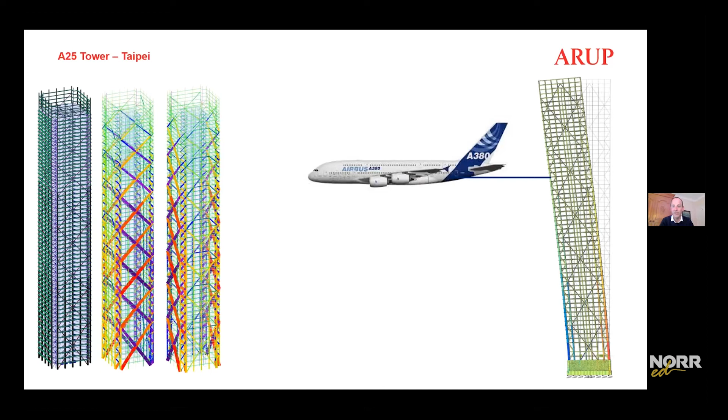Now, what's the plane about? Here I'm trying to convey the wind forces that act on the building during a super typhoon. It isn't actually equivalent to a single A380 pulling on the building - it's actually more like this, equivalent to 63 A380s at full takeoff thrust, all pulling on the building. And this is the design wind condition for the project after all the wind sculpting, so nowhere near the worst case scenario of what it actually could have been.

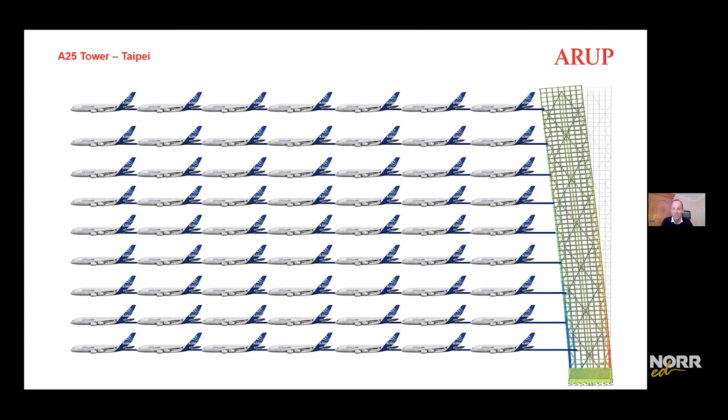Also during earthquakes, the internal forces generated in the system are even greater. So even though we had 24 perimeter columns, as opposed to the 6 perimeter columns at BBVA in Mexico City, the peak load here was actually over 70% of the BBVA column loads. We actually had much higher tension in the columns than we had at BBVA, due to this incredible overturning effect, which originates primarily from the wind.

So again, it's absolutely critical to integrate a robust transition from the superstructure through the basement into the foundation. We take nearly 20,000 tons of compression force in the columns and 10,000 ton tension force in the columns. And the ground here - looking at it, the closest similarity I can think of is it's kind of like black toothpaste. It's so soft, it kind of falls away. And this is what you're trying to provide foundations for, to resist these immense forces.

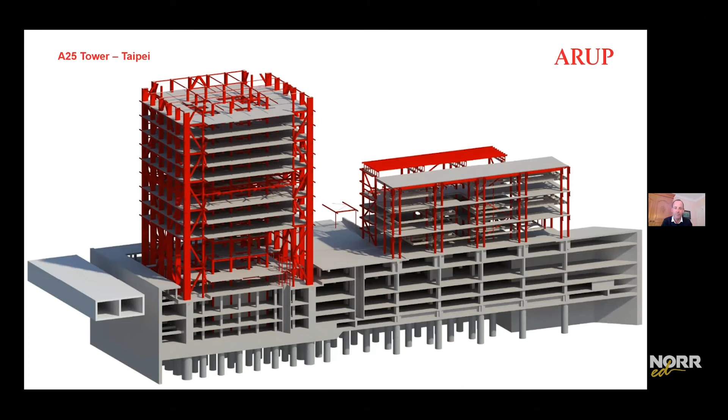So all the structure, of course, comes at a great cost. So we need to use all the tools and all the ideas to minimize the loads and the structure. And in structural design, ductility is one of these tools we use. Ductility basically means allowing something to deform in a controlled manner, which means we can design for smaller overall forces. The opposite of ductile is brittle.

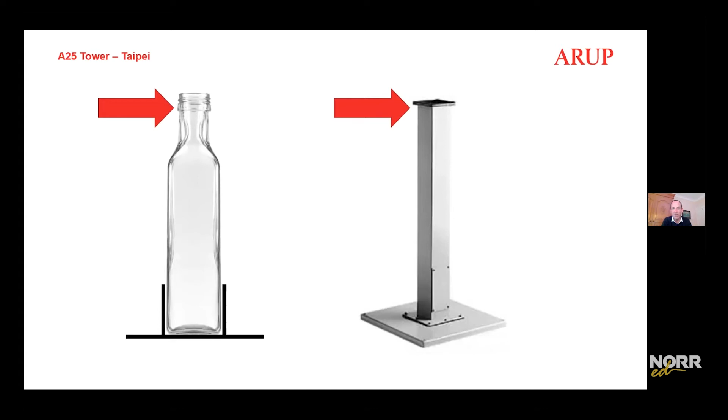So a glass bottle, like the image on the left, is pretty strong and stiff, but once you exceed the capacity in it, it will fail catastrophically and basically explode. While the steel tube, on the other hand, you can imagine bending and deforming while still resisting some load, even if it is weaker and more flexible initially.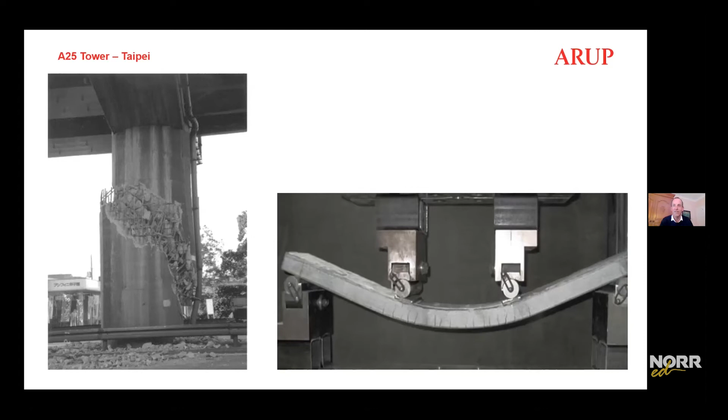And the same can apply to concrete. These are some images that are borrowed. One shows a brittle concrete failure in shear, and the other shows a ductile concrete failure in bending. So it all depends on the configuration and the reinforcement and how we make the elements resist the loads.

So for a building system, the most ductile system we have is what we call BRBs, buckling restrained braces. And these, when combined with ductile moment frames, allow us the maximum code force reduction factor of most ductile design. So these BRBs - I'm not going to go into it now - but basically it's sort of a truss within the truss.

Or it's an element where the central gray element is allowed to yield and deform in a controlled manner, both in tension and in compression, because the outer casing, the red casing, restrains it from buckling - hence the buckling restrained braces.

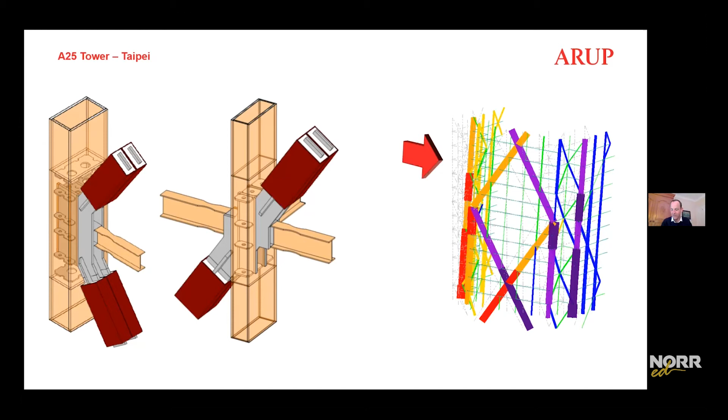So on this project, we managed to integrate and develop the largest BRBs ever, actually about two-thirds larger than the largest reference project we could find. And even so, we still needed double BRBs in pairs. So absolutely immense forces on this project.

But why were the demands so crucifying on this project? I mean, it's a relatively moderate sized tower, 265 meters tall and 42 meter footprint. So we really wanted to get to the bottom of why the demands were so difficult to manage on this.

So we embarked on a research project to fully understand the interaction between wind and seismic demands on this tower, and towers generally.

So if you have only seismic loading, like on BBVA, you design the ductile elements - or the little link in that project, or the BRBs on this project - for the seismic demand. And then you design all the other elements for what we call an overstrength demand.

So basically a slightly amplified demand, which allows us to make sure we capture the upper band forces that happen in the ductile system, and then all the other parts of the project remain elastic and don't get damaged, deformed, or yielded in that condition.

But if the basic wind demand is higher than the seismic demand, then this approach isn't valid. And the reason is that we need to design the ductile elements to resist the wind loading too. So we need to increase the capacity of those.

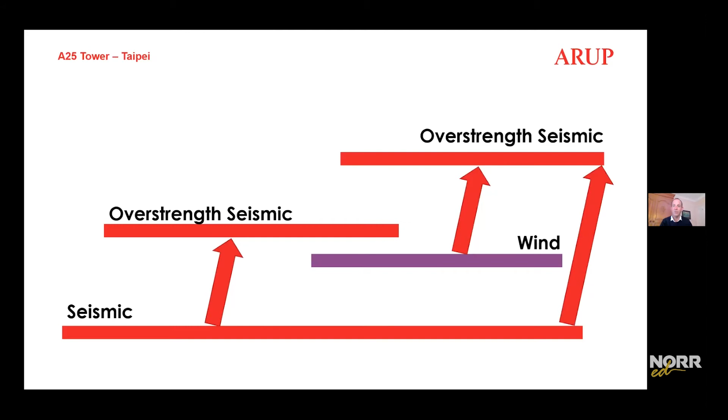So for the A25 viewpoint tower, the braces needed to be increased to resist the wind loading. But then if a large earthquake comes along, these can yield and strain harden the BRBs, so that the columns and the foundations experience an amplified loading in turn. So these are additive effects, and we need to design for all of this, of course.

So for those particularly interested, we published a paper on the generalized interaction of wind and seismic loading on tall buildings, and this is freely available to download.

As a very brief summary, we identified basically four zones of wind-seismic interaction. You can either have purely seismic governed, like BBVA and Atrio, which I'll show in a minute - wind plays no effect. Or you can have a purely wind governed project like Yongsan - even though Seoul is somewhat seismic, that had no impact on Yongsan.

Or you can have the case where both wind and seismic interact and govern, like on A25. And in that case, we fall onto what we call the ridge of despair, where they are in effect additive. They're additive not because they happen at the same time, but because they both increase the demands in the structural elements. I'm just looking at the time here.

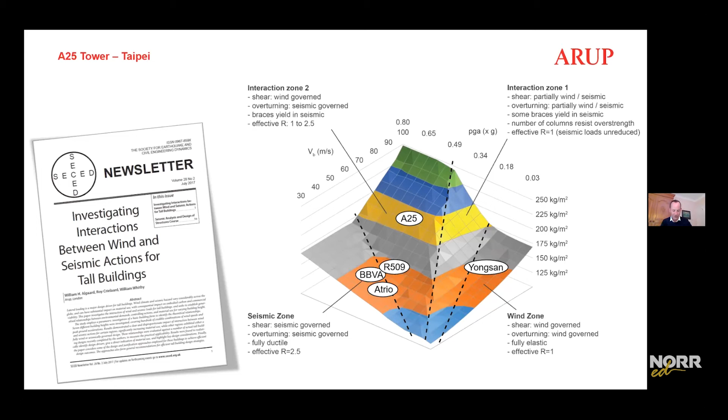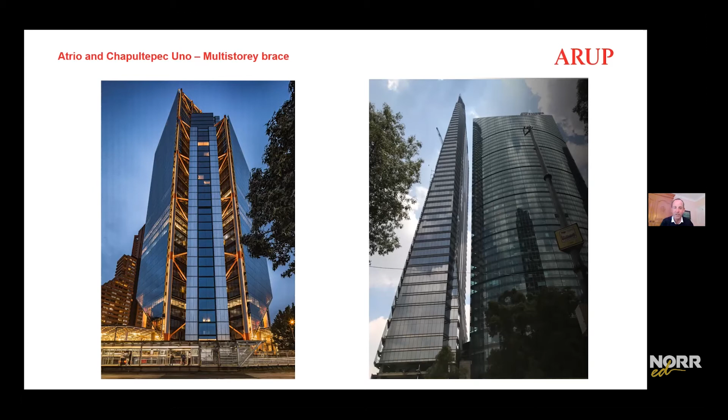Atrio was unusual in that there was a huge cost and skill difference between steel and concrete in Bogota. So we aimed to use concrete wherever we could, and steel only where we absolutely had to. In this case, we had a concrete core and used steel reinforced columns. But the braces were steel — ductile special concentric braces, SCBFs — unusually on a 2-story module, not a single-story module.

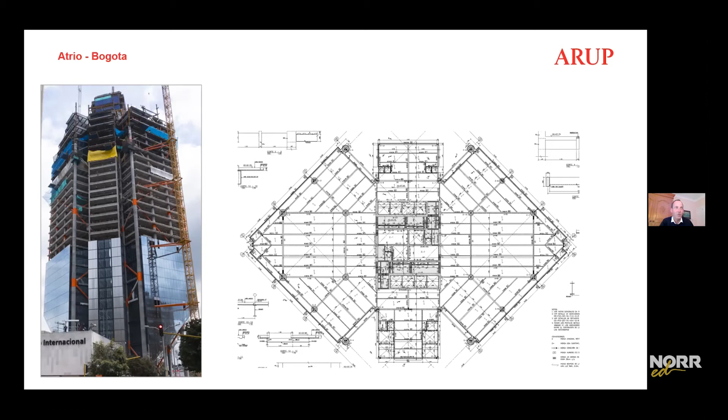R509 is super slender — 245 meters tall and only 25 meters wide at the base — again on very soft ground. So on this one we used soil-structure interaction to take advantage of the 12-story deep, stiff basement to reduce the seismic loading. This one too had an enormous amount of car parking, including in the basement levels as well as the tower superstructure.

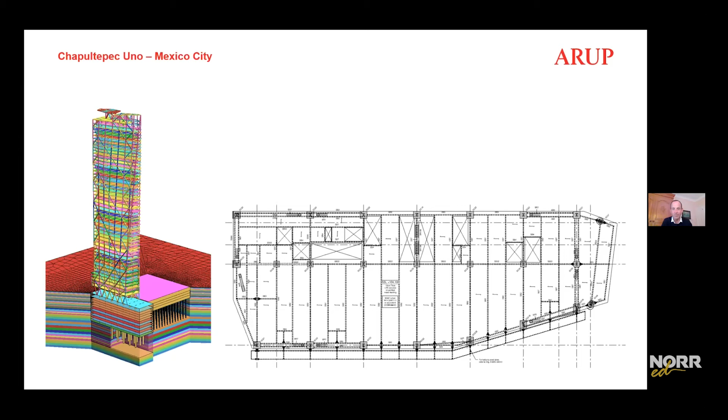So pretty unusual, but common for both these projects is that we used multi-story special concentric braces. On Atrio, they were a 2-story configuration, and on Chapultepec R509 a 3-story module. We used multi-story braces simply because they're more efficient for a sensible column spacing.

BRBs do this well, but other braces typically don't do it so well. So we wanted to take restraint at each floor level for the braces, to make them stocky and have similar tension and compression capacity, and also just a high efficiency of the braces overall.

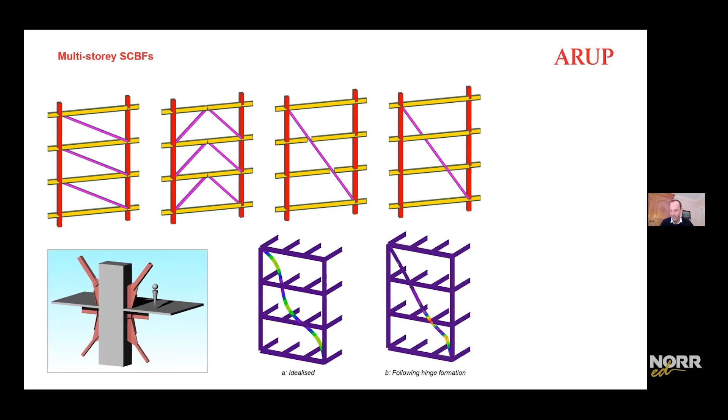So we need to control the plastic strain that happens in the braces and spread it out as much as we can. We were pretty surprised when we couldn't find anything published on this technically, because we thought this is something you'd always want to do. So again, we did our own research.

We combined advanced analytical approaches together with published experimental data. We didn't do any of our own physical testing, but we could adjust the analytical approach to match the published data for physical testing.

This research allowed us to successfully establish the parameters that govern this multi-story approach, basically getting each of the spans to contribute and distribute the strain. The impact of this on the building design and efficiency was pretty significant. And because of the novelty and the impact, we made sure this was peer reviewed, which was a fruitful and constructive approach.

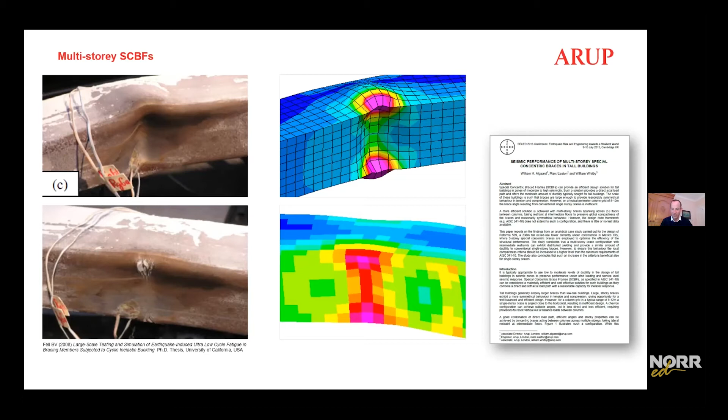So there's loads more to say on this topic, but I could refer you to this paper, which is actually pretty easy reading compared to the wind-seismic interaction one, which is pretty heavy going.

So getting to the end now, I wanted to share some of the general approaches we've picked up through the many projects where we've been working hard to achieve efficient, low carbon, tall building design. I haven't talked about all of these in detail, and some are quite technical, but others are important also for architects.

So the first step is to limit the demands. If it's a wind-governed project, you've got to get the wind sculpting and the massing right in high wind areas.

Not too slender a project, and ideally tapering the project. If it's predominantly a seismic area, limiting the weight is the most effective tool to limit demands.

Then also soil structure interaction. Then using the full footprint to resist the overturning, so mobilize all the perimeter columns.

It's pretty much always more efficient, and there's many ways of doing it: outriggers, braces, preferably not a moment frame. Those are always less efficient, but very ductile, so maybe use them in combination with something else.

Then mobilization of all material. What I mean here is once you've provided all the material for gravity, then use it for lateral resistance. The reference here is Yongsan — the core in Yongsan is already there, so let's use it also for overturning.

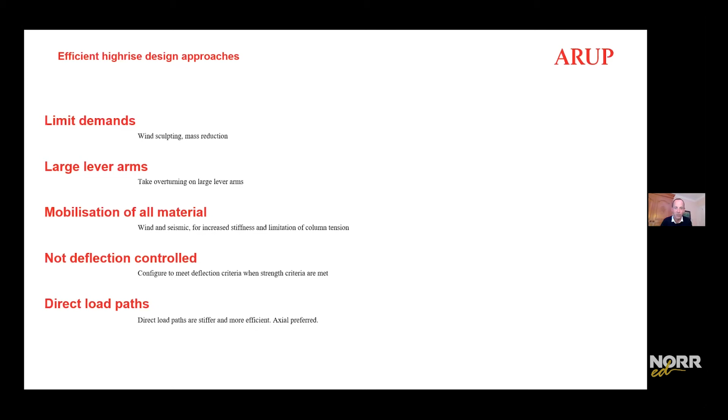And then using the material in the most efficient way. The key here is, is it a compression demand or a tension demand? If it's predominantly compression, concrete is lower carbon, lower cost typically, but sometimes columns go into both. On A25 we had immense tension in the columns, and on a super tall, super high-rise project, the weight of the columns themselves might become a key driver.

So you can't fully generalize these things, but typically using the material in the most appropriate way is generally best. Finely tuned systems — this is about investing the time in really tuning everything, avoiding differences between tension and compression resistance in the braces, reducing the overstrength that applies in the ductile system. Increasing sizes can actually be unconservative: if you've got braces in the building and decide to rationalize them, make them all the same, you really need to design the columns for larger loads than if you optimize all the braces. It's not always that straightforward or that obvious.

Performance-based seismic design — where this is possible and where the codes allow, you can use performance-based design rather than simplified code design. Code design really isn't written for tall buildings, at least typically. First principles approaches generally are better and allow you to get a more efficient building that can perform better, but you typically need to adopt the spirit and the intentions of the code, even if you don't follow them quite to the letter.

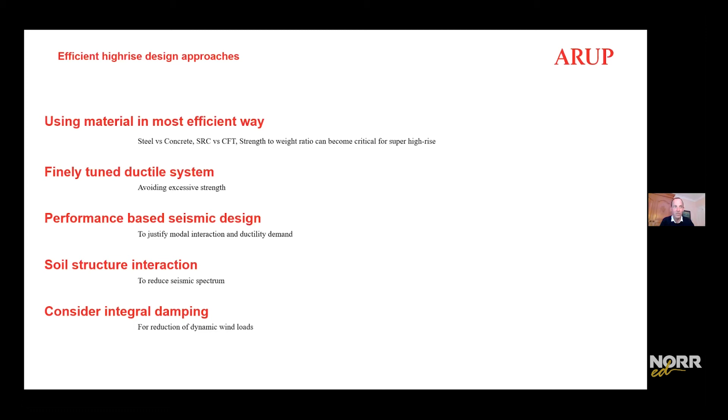So I know I've probably gone over time here, but those are kind of 10 key steps for efficient tall building design. Hopefully I've been able to also demonstrate the value of explorative, first-principle designs, relying on physics, maths, and advanced analysis rather than necessarily precedent or code design. So on that note, I'd like again to thank you for the opportunity and head over to the questions and the discussion. William, thank you very much.